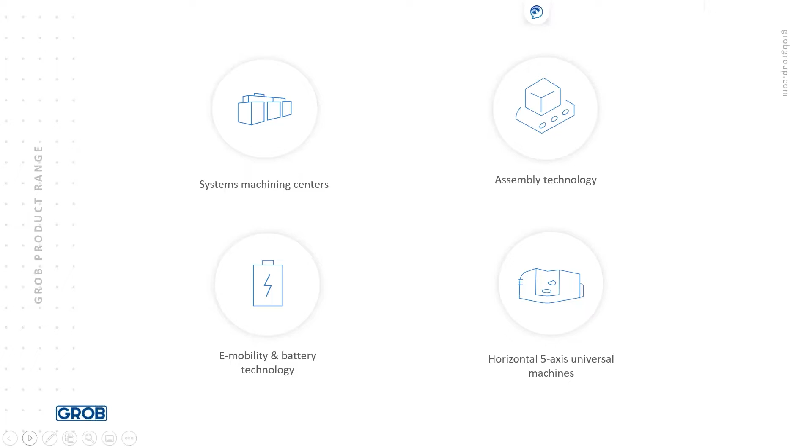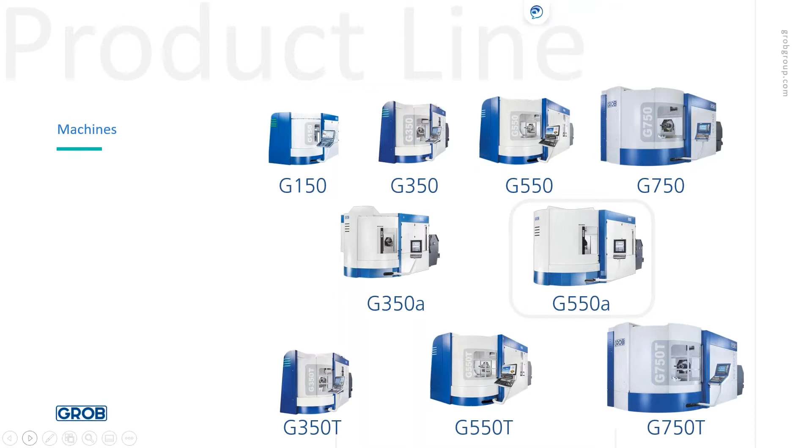Some of the advantages of our design, the GROB system. We have quite a bit of A-axis stroke. It's the largest that you'll find in the industry. It enables us to do overhead machining. One of the benefits of having that swing is that it's easy to clean off our pallets, wash them down, get chips out, so it's easy for automation.

Then the horizontal spindle concept, like I said earlier, cleans out the work area so you're able to flip the part upside down. And that gives you a good way to clean it, but also access components, part of the component that is a unique tangent point.

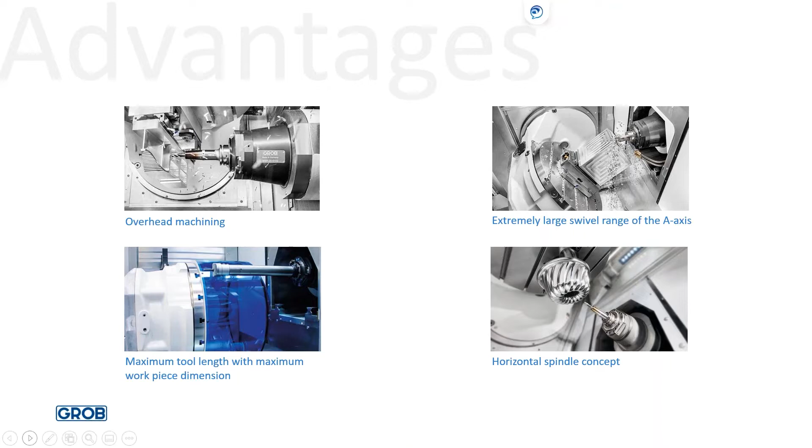In the US, we're set up to support North America, Mexico, Central America, and we do have application engineers stationed there. We have service coming out of there. We do have a crew of mechanics that build the machine, that are able to go out and support the machine. We have our sales based out of Bluffton, and we're also a hybrid, in that we do have somewhat of a dealer network in different parts of the country.

Hi, everyone. My name is Ernie Dickinson, and I'm representing Open Mind Technologies. We developed a product called hyperMILL. hyperMILL has been around for roughly 25 years. We are a global company with 17 subsidiaries and over 50 resellers. You can see we have many licenses out in the field, many customers covering many different industries.

Our global headquarters is in Munich, Germany, where we develop the software. Locally here, we are decentralized and based throughout the United States and Canada, as well as Mexico and South America.

Primarily, we sell direct. We do have some dealers in some small locations, but for the most part, we are selling direct to our customers. If there's a problem, you come to us. We can go directly to the developers. There's really no middleman for us.

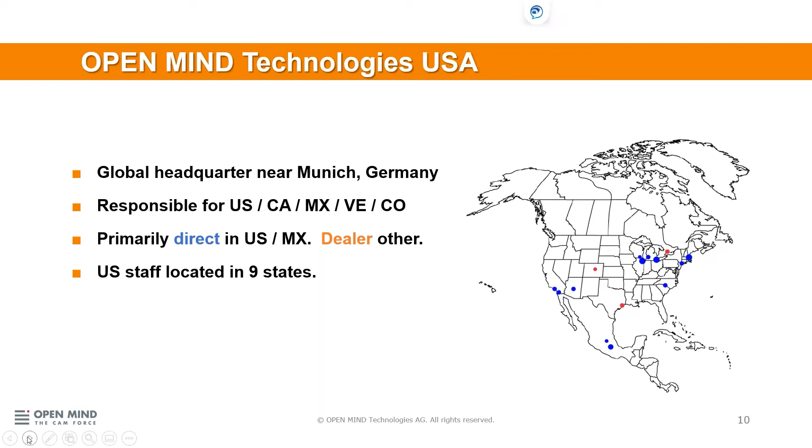We have staff located in 9 states through the more industrial part of the country. Here you can see our entire staff. Everybody in this picture has at least some 5-axis experience, a lot of number of years in the industry doing many different types of parts.

We do our own local post-processor development, as well as develop directly in Germany, especially for the more international machine tools like the GROBs. We offer hotline support. So you call us, we have an 800 number. We'll get on with you and do a webinar and make sure you're squared away. Also, we offer training as well, either direct or online, part consultation, and also partner collaborations as well.

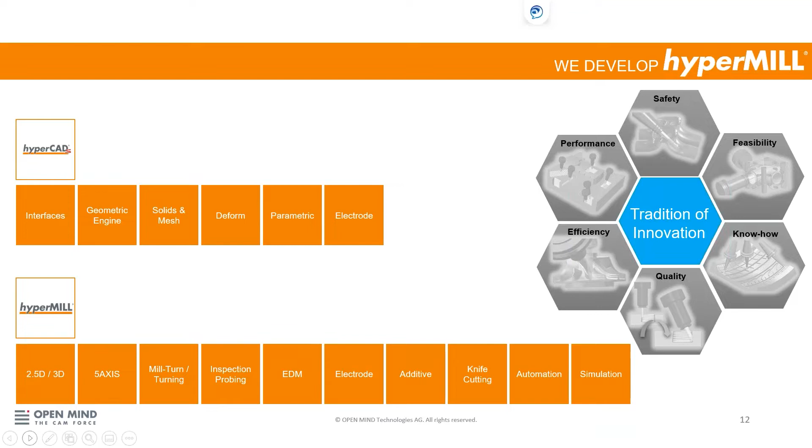In this slide, we want to showcase that with CAM, it's more than just creating toolpaths. CAM has become more of a nebulous thing where it's controlling the whole process digitally. That would be virtual machines, post-processors. We offer automation. We offer additive manufacturing. So a bunch of stuff on top of just the standard 5-axis programming is offered inside hyperMILL.

Hello everybody, my name is Evan Duncanson. I am a milling support specialist here at EMUGE-FRANKEN, and we're just going to go over a company overview of EMUGE-FRANKEN as a worldwide company.

EMUGE was established in 1920. There are over 1,900 employees worldwide, 9 production facilities worldwide. We have over 110,000 stocked items, different part numbers, global support, obviously, and we are also privately owned. The current owner of the company is the son of the founder, and his 2 son-in-laws help him run the company day to day.

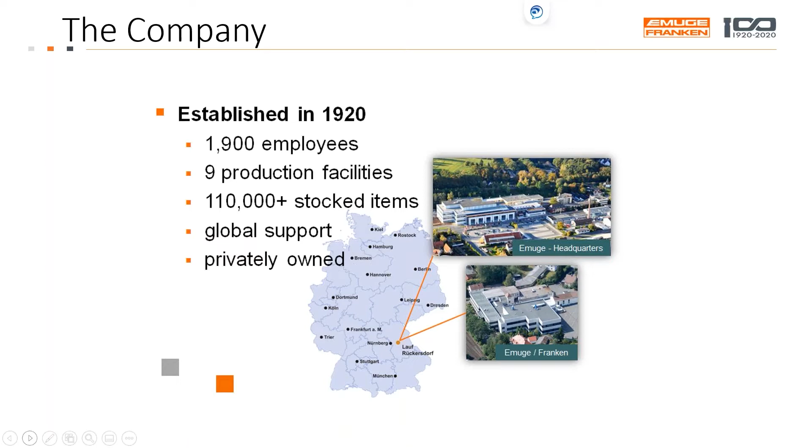So for manufacturing in Germany, EMUGE is based in Lauf, Germany, about an hour or two away from Munich. And EMUGE makes everything, from taps, thread mills, drills, holders, work holding, kind of the whole gamut, other than our milling products.

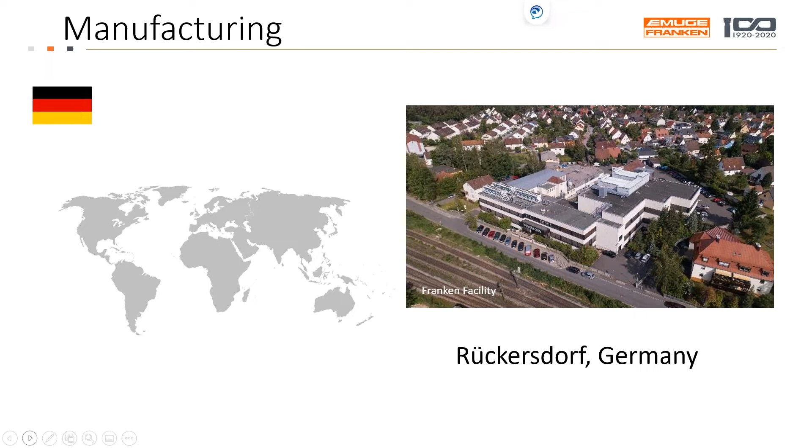And our milling products are made by Franken. So we are the same company, but we still have the 2 different names. Franken is based in Rückersdorf, Germany, about 15 minutes away from Lauf and EMUGE. They're right down the road from each other. And they make everything milling and also some tool holding, specifically for milling. They were just established in 1916, so Franken is actually older than EMUGE. EMUGE purchased them about 60 years ago, so now we're one company. Franken is comprised of over 400 employees, and they're in Rückersdorf, Germany.

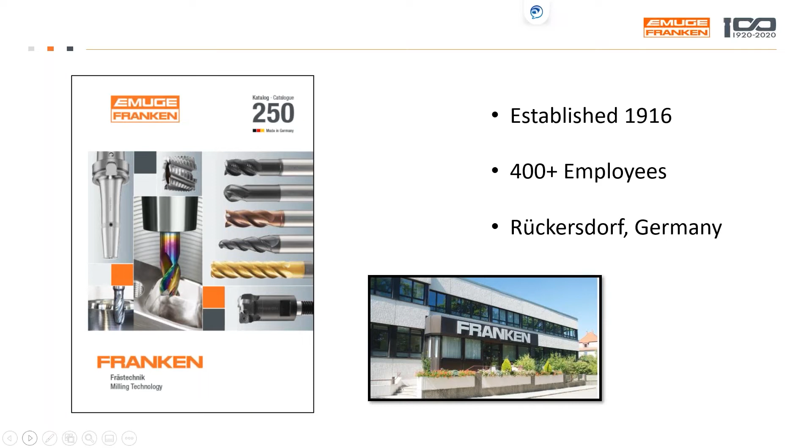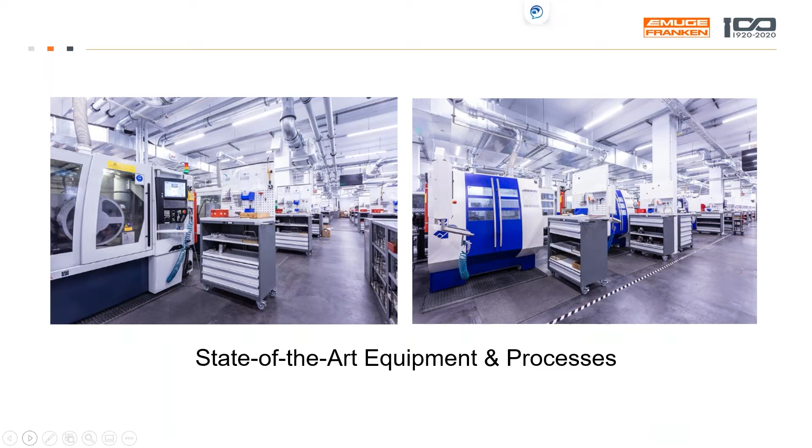And then here in West Boylston, Massachusetts, that's where we're located. So we're the EMUGE-FRANKEN location for the US and Canada. We have over 26,000 square feet of manufacturing space in our new building. We doubled the size of our building a few years ago, and 26,000 square feet of that was for manufacturing.

So those are full of ANCA machines for special and standard end mill production. And then we do also have a PVD coating vessel, so we can do coatings of end mills and drills and all sorts of other stuff in-house as well.

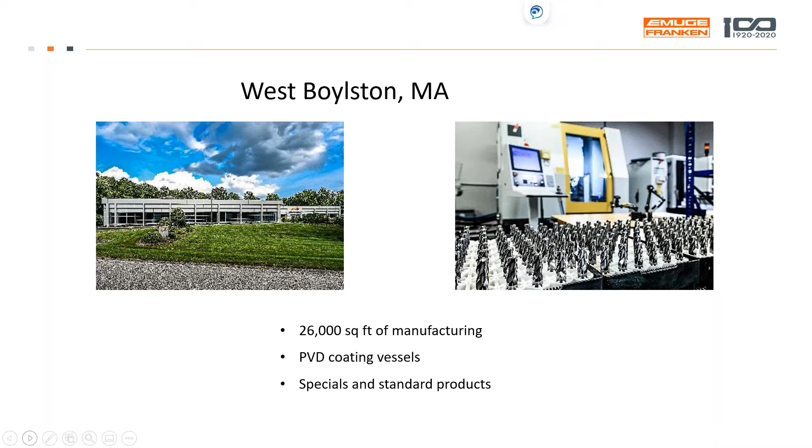Along with actual manufacturing, we have our technology and training center. So our technology center has the GROB 550A machine, and then we have several training rooms of various sizes that we can hold trainings or events in. We like to use the training or technology center as much as we can for test cuts and events and all sorts of stuff where we can actually use the tools and cut material.

EMUGE and Franken are always continuously improving and doing a lot of R&D with different revolutionary ideas or tools. So these are just a couple.

The punch tap and the Taptor are currently the fastest way to make a thread in cast material for the automotive industry. The self-lock thread is a self-locking thread, as the name suggests, that locks the bolts in the thread and does not let excessive vibration pull the bolt out of the threaded hole.

Our circle segment tools are for faster finishing with 3D 5-axis toolpaths. Our PAGODE cutter is a new version of a Christmas tree cutter or fir tree cutter that helps stabilize the process so much that we can go up to 10 times faster feed rate and have 10 times longer tool life than a regular fir tree cutter.

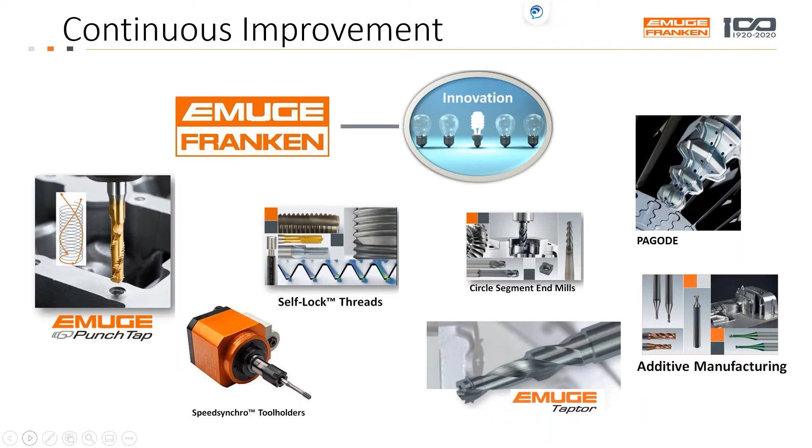So here today, at the die mold workshop, this is the component that we're going to cut. The component is just a generalized component that has certain features on it.

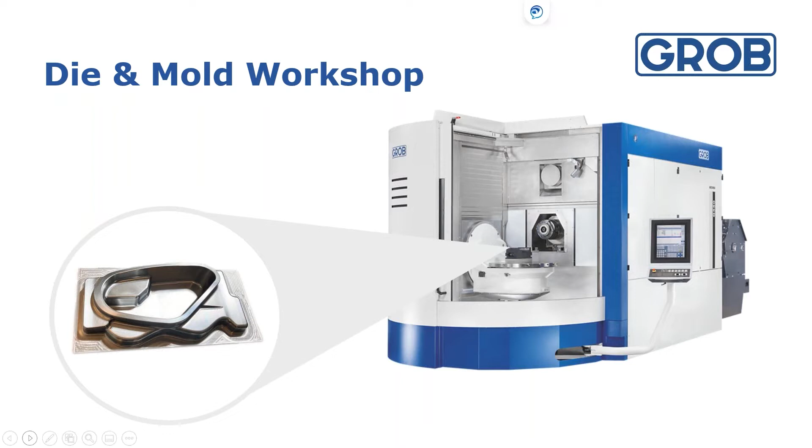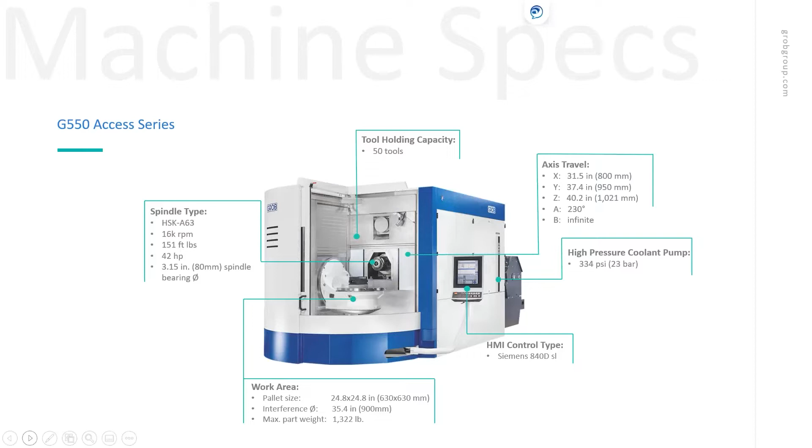Looking at the G550 Access series, which is the 550A, you can see that we're outfitted with an HSK 63 16K spindle that can generate 42 horsepower. The tooling capacity of this piece of equipment is 50 tools. You can see the axis travels over there on the right. It does come with a high pressure coolant system, and we have a Siemens control with our GROB interface. Our work area is capable of handling a 630 millimeter pallet, and on a diametrical, it can handle up to 35.4 inch diameter, max weight of 1,300.

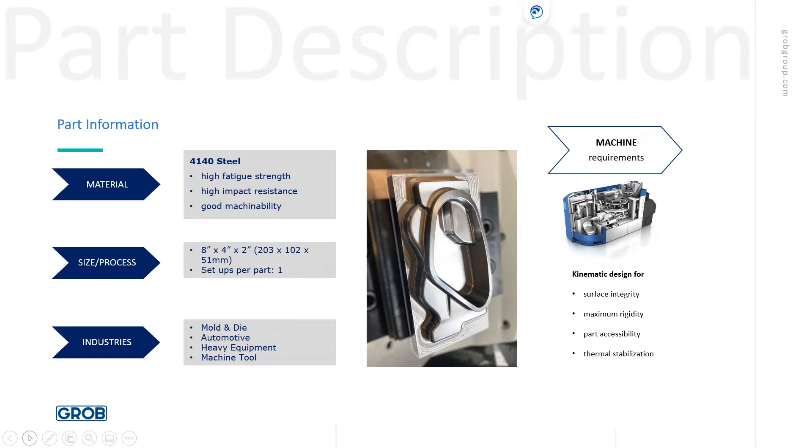Here's some more information about the component. It's a 4140 steel component. It's relatively small compared to the size of the machine, 8x4x2. And yes, you'll find this in die mold, automotive, and other industries.

So we're going to talk about the roughing tool that we're going to use to rough out the part here. It's a multi-cut duplex, and there are several key features that I want to go over that make this tool an all-around very good tool for roughing out die and mold parts.

So the first feature on this tool is the duplex geometry. The duplex geometry is the high feed end on the end of the tool. It has a negative rake angle, so it actually pushes the material instead of cutting it. Because of that, you can increase your chip per tooth significantly. You can go up to 40 thou chip load with a very shallow depth of cut, but a very large step over and a very large chip per tooth to just blast through that material and cut out a lot of material with this high feed strategy.

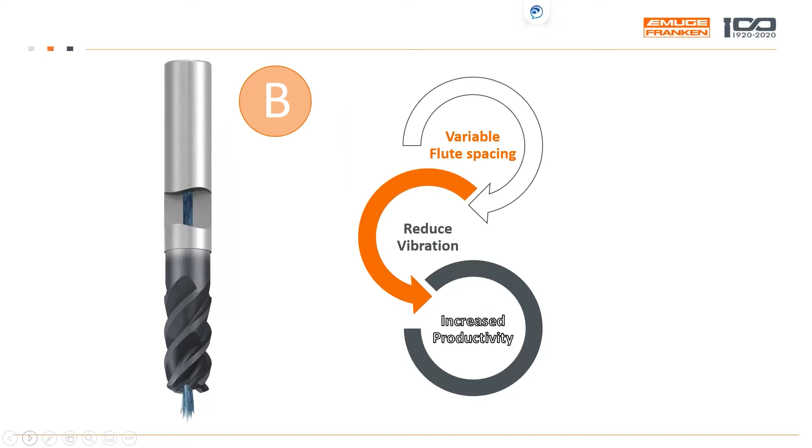One more feature of this tool is the variable flute spacing and the variable core diameter. So the first half of the flute, from the end of the tool, actually has a much smaller core diameter than the second half. That's because if you want to slot very aggressively with this tool, having a smaller core diameter with bigger flute channels and more chip space allows you to get the chips out of there and really blast that material. But the second half has a much larger core, so if you want to use it in a more long length of engagement using the whole flute length, it's a much more rigid tool than having that small core all the way up.

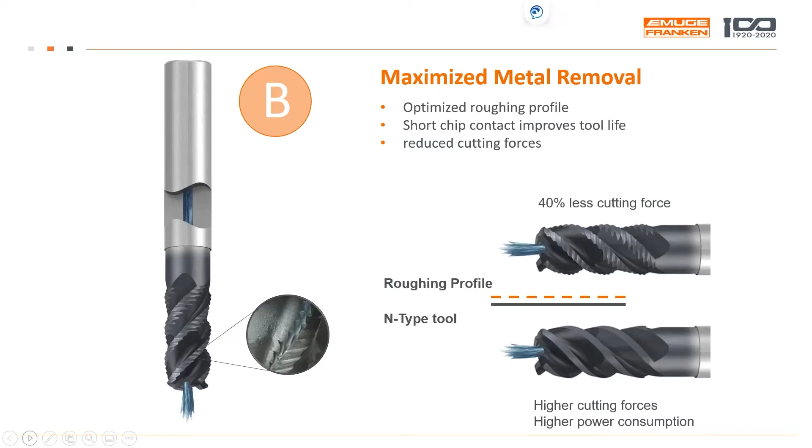Also, the multi-cut feature of this tool refers to the roughing profile. It's essentially a high performance new version of a corncob rougher. This roughing profile reduces the cutting forces by about 40% on the spindle, because you don't have that one smooth edge in contact with the material at all times. You have a lot of these tiny little teeth, and it reduces the amount of forces. You can see in the picture there, that's actually the chip formation on each one of those little teeth. So it produces very small chips that are very easy to evacuate and get out of the way.

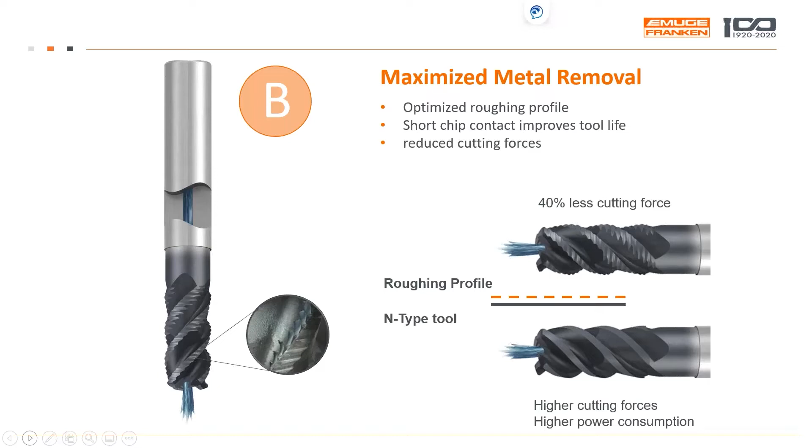One more feature of the Duplex series is it comes with coolant through. So some of the Duplex tools are solid, and some of them have an axial coolant hole. Normally with cutting steel, we would suggest using just an air blast. But if you have a part with a small pocket and you're having a hard time getting the air down in there and clearing the chips out of the way, and you're packing chips and double cutting chips, the coolant through can be utilized to blast those chips out of there and get them out of the way.

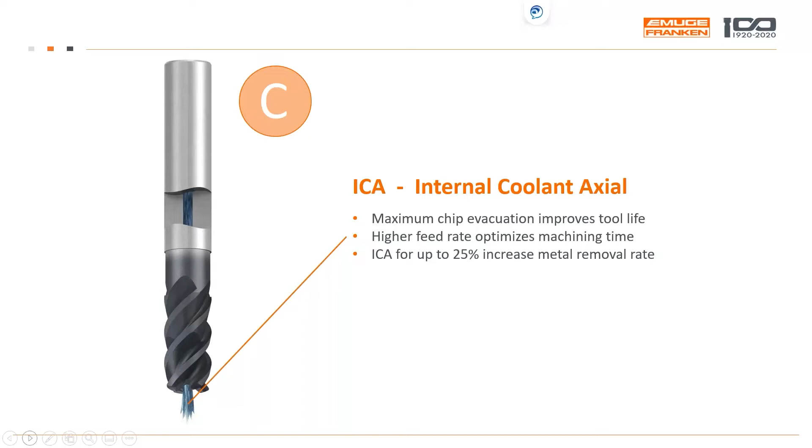And then you can actually increase your metal removal rate because of that. One more feature of the Duplex series here is the coating.

So the coating on this tool is a TiALN multi-layer. It's actually a really interesting coating. It's not just one layer of TiALN, it's several layers. What's interesting is when you put some heat into it and get it to a certain temperature, it actually creates an oxide layer on the outside of the coating and changes its structure and characteristics, and becomes harder.

If you weren't putting as much heat into it, it's not going to hurt the tool at all, but actually getting some heat into there will prolong the life of the tool, surprisingly.

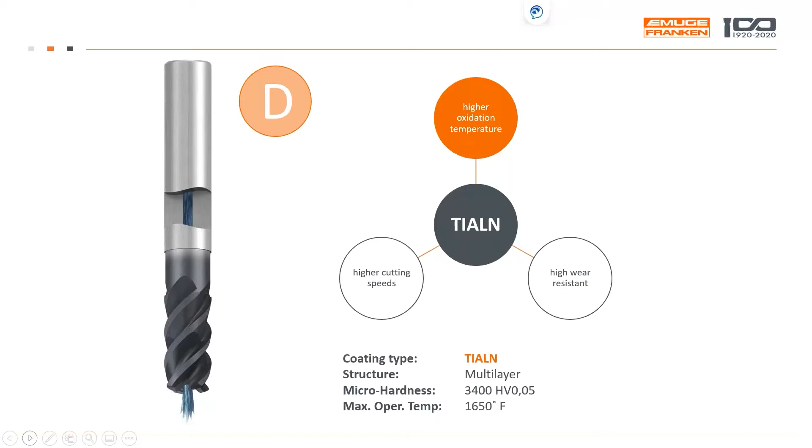And then one last feature of the Duplex series is the carbide. It's a very high grade sub-micro grade of carbide, very high hardness, but it also has some flexibility in there. Because you're going to be using this in very high feed rates and very high force applications, maybe doing very heavy slotting, a higher hardness, more brittle carbide is just going to break down a lot faster because it's not going to allow the tool to move around just a little bit that it needs to be able to slot aggressively. And this carbide can do that.

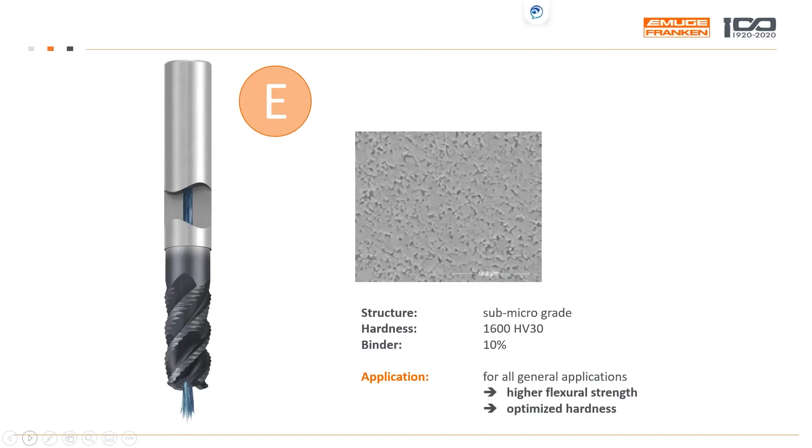On the GROB, as I mentioned briefly earlier about the horizontal spindle, you can see in this animation that on the left side, the horizontal spindle sits on a carriage that has linear guideways. There are 3 trucks on each side of the spindle for a total of 6 trucks. So as the spindle moves out into the work area and engages the component, we have the ultimate rigidity. We're not extending beyond the linear rails or the carriage, and we can approach and pass the center of that table.

On the right side, you see the animation of a vertical 5-axis with a trunnion table underneath. As that spindle comes down, it projects outside of the trucks, so you have a large unsupported area the closer you get to the table. GROB firmly believes that the horizontal approach is the most rigid, most flexible, and the easiest to use.

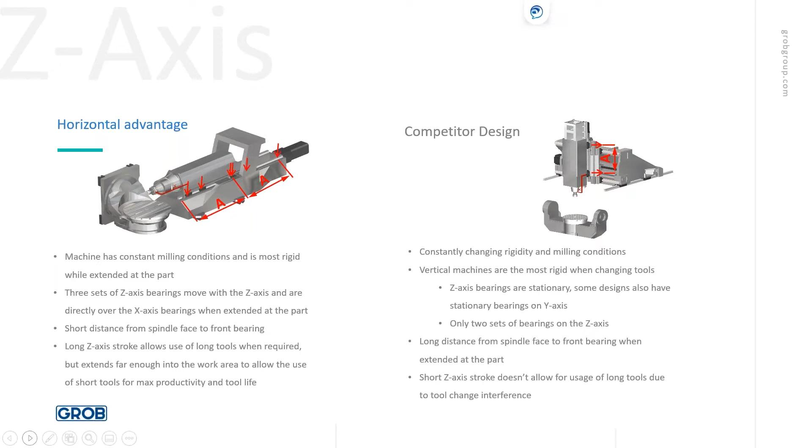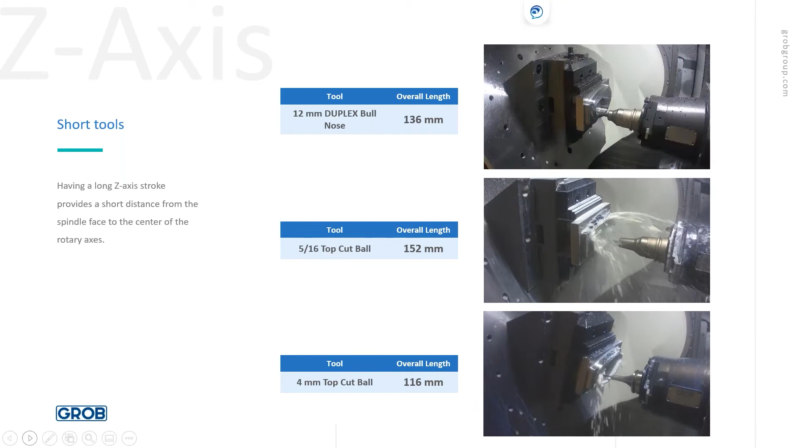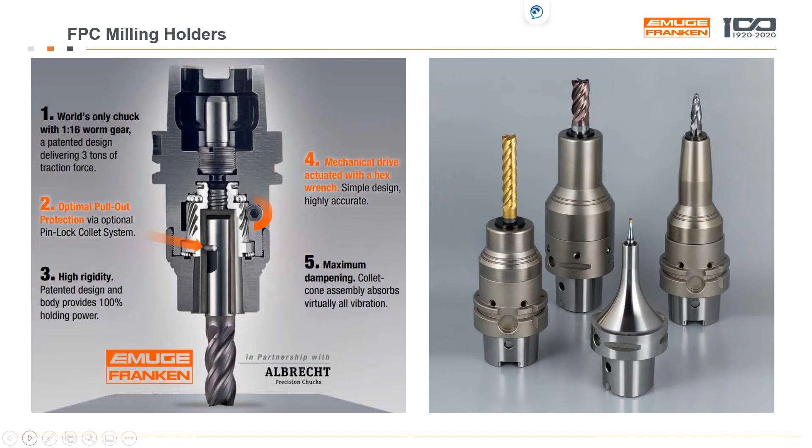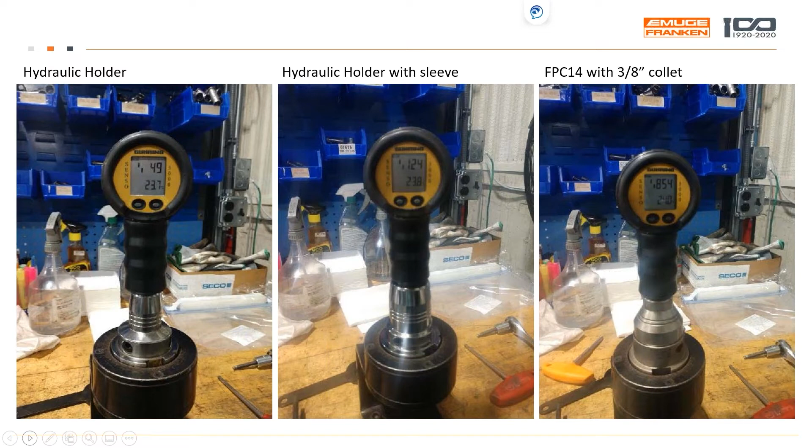We're not using circle segment tools on this part, but I always like to talk about them real quick. If you're not familiar with the circle segment technology, it essentially takes a ball mill, you zoom in on it, and then you take a small segment of that ball and put it on a tool. For instance, a taper form end mill, one of the shapes we offer, say you have a 16 millimeter shank, that might have a 1,000 millimeter cutting radius on it. So it's like using a 2 meter diameter ball end mill, but on a 16 millimeter shank tool. Because of that, you can increase your step down or step over many times, from say maybe 5 thou to 80 thou or something like that. And that just decreases your cycle time to finish a part.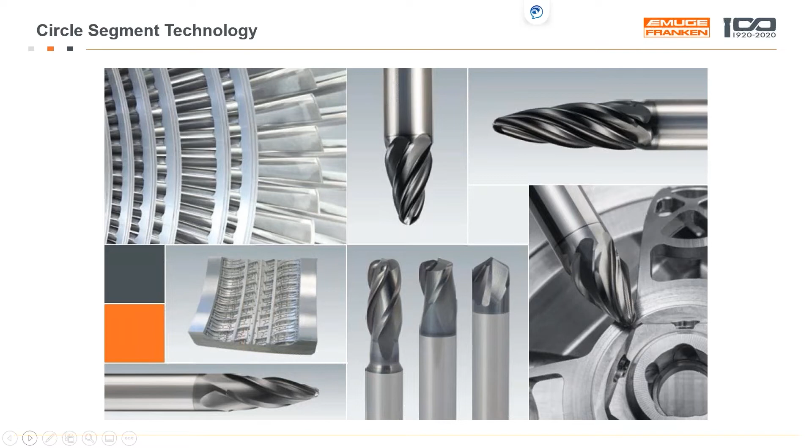There's 4 different types or shapes that we offer. The taper form up at the top is like the one I was just talking about, which offers the largest radius option of all the tools. The oval form is kind of the next option I like to go with if I can't fit a taper form in there. The oval form has a smaller ratio from the shank to the cutting radius, but because of that, it can fit into other areas that the taper form might not be able to. Then the lens form, that's mostly for shallow floor finishing, say a tire mold or something like that. And then the barrel cutter, kind of a standard barrel shape, that's mostly only used for undercuts.

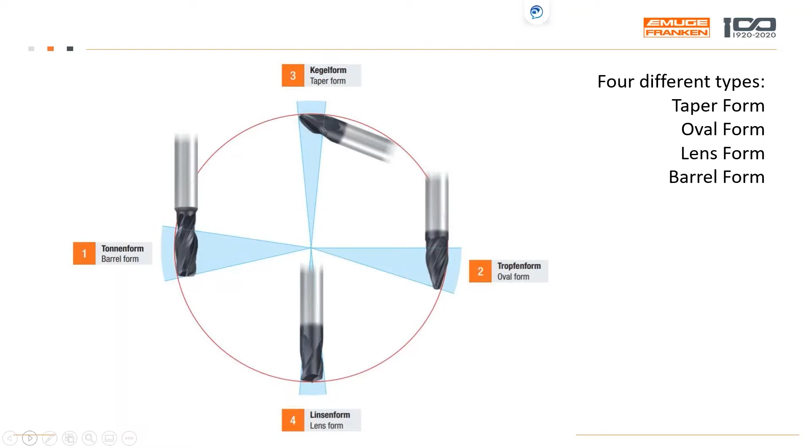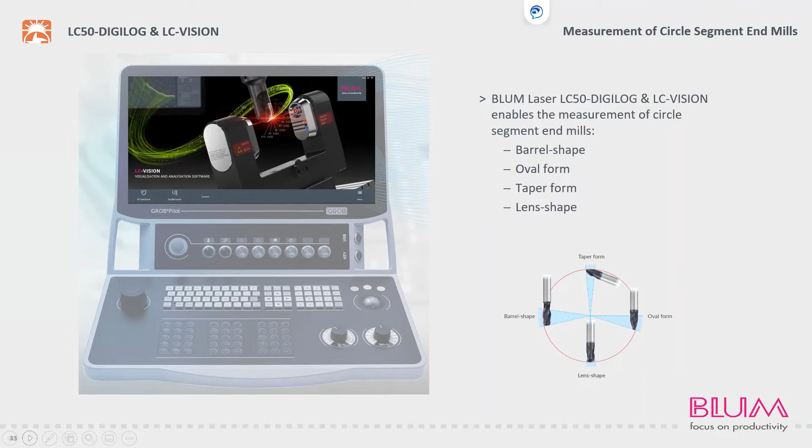On the GROB, for tool length and diameter, we use a DIGILOG from BLUM. The DIGILOG is capable of handling a lot of different geometries that are on tools, just like Evan mentioned, so it can handle the barrel shaped tools, the oval forms, taper forms, and lens shaped tools. This is just showing you a little bit of a graph and simulation of measuring a barrel shaped style tool and the typical readouts that you're going to get from it.

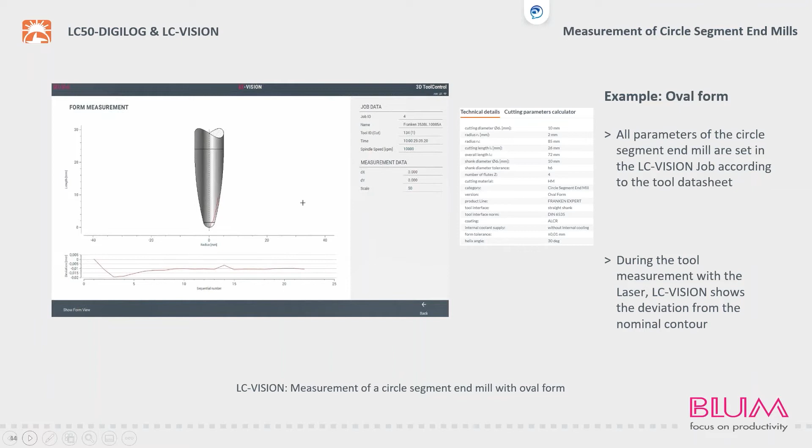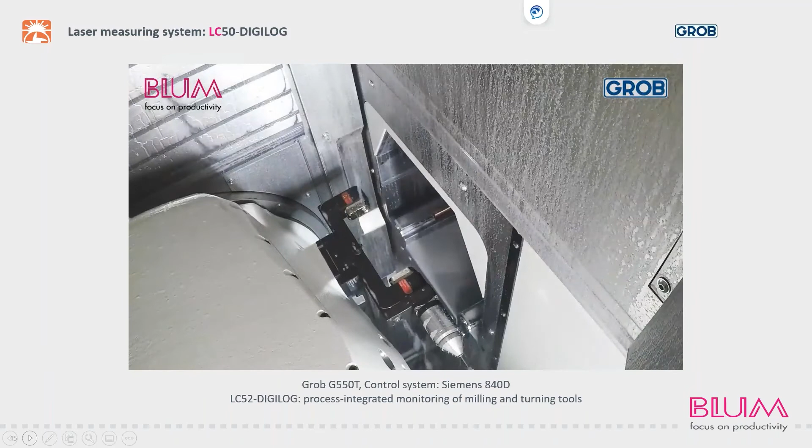This is going to be a little bit of a video showing you that operation inside the GROB. A couple of things to pay attention to: you see that the spindle is working out of its tunnel, it's not really inside the work area. And once we flip the table over to get to the BLUM, most of the chips and the splash go away, so we have nice access to the BLUM laser.

One of the other options with the GROB, and part of the design and build of it, is that we can use longer tools right out of the tool changer without making any alterations to it. You can see on the left side there, the machines 150, 350, up to the 750. It gives you the numbers of the longest tool that you can put in the tool changer and that'll swap out in the operation. So on the 550, you can see that standard, we can put an 18.3 inch long tool in there. So the flexibility of that machine is pretty immense when you look at the length of tools that you can accommodate in regular operations.

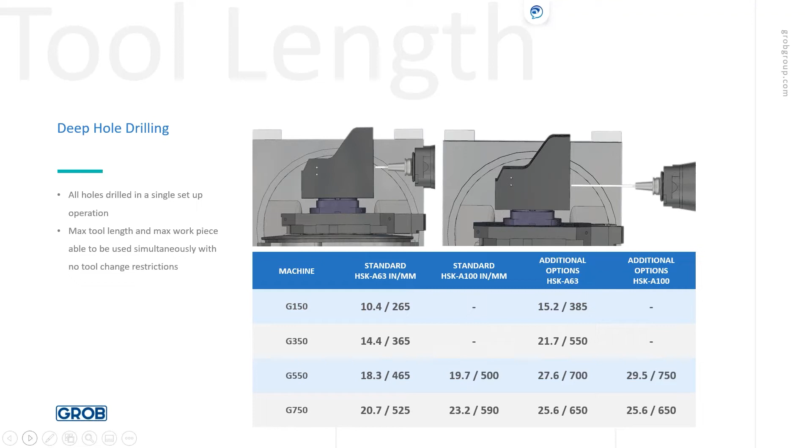Thanks, Kevin. At this point, I want to talk about some of the programming techniques and tools inside the CAM software we used for this part.

The first one I want to speak about is our automatic extension of milling surfaces. This is done based on whatever boundaries we're picking, and essentially it's an automatic way of extending those surfaces, so there's a nice runoff with the tool path and you're not starting and stopping on actual material. This is all done automatically inside the software. In the old days, it was very common for people to construct these surfaces using the CAD system, but now we've integrated some of that CAD power inside the actual tool path itself, with some knowledge of where they actually be and how far they have to go for it to work.

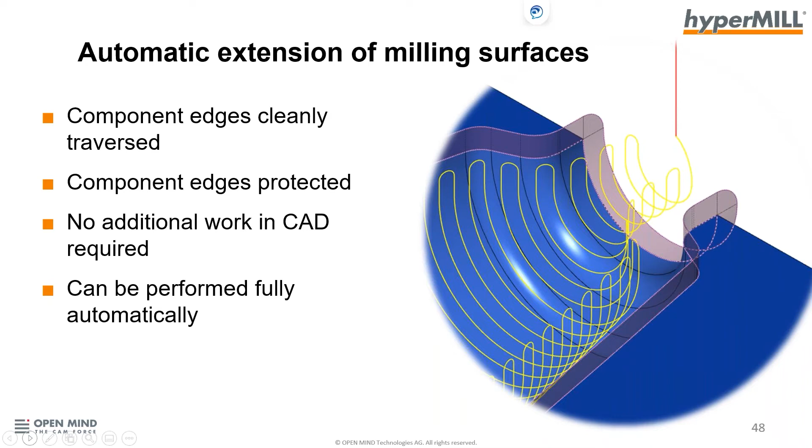This is implemented in a few of our cycles: the 3D profile finishing, the 3D Z-level shape finishing, 3D corner rest machining, 3D equidistant machining, and also our 5-axis tangent machining. And this list is ever increasing, so we're adding it in places where we feel it's needed moving forward.

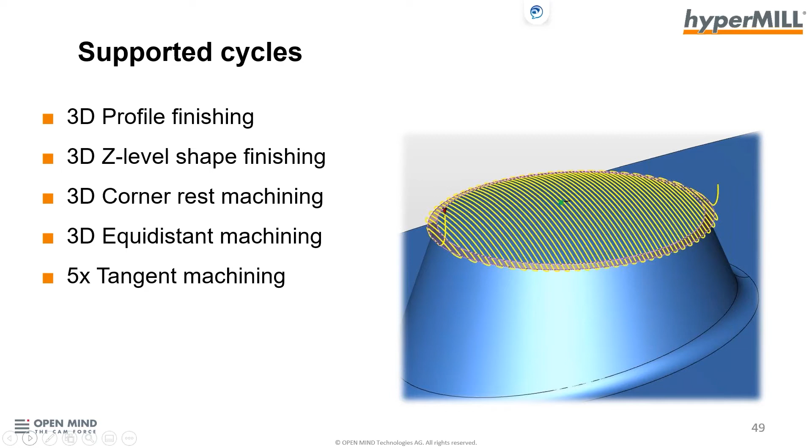So a second tool we use to sort of go along with the automatic surface extension is our smooth overlap function. The smooth overlap can work in conjunction with the surface extension, or it could be on its own. Essentially what this does is it adds some extra tool path to the intersection between other tool paths, and it starts off the part a little bit. So you're no longer coming down, starting on a previously machined area and then working into the area you want to machine. It actually builds in a smooth transition from one area to another.

So we feel this is a game changer when it comes to mold and die applications. Anytime there's transitioning between surfaces, this is a very powerful tool to make sure that transition is as smooth as possible, and you don't see any start and stopping or any difference between the tool path.

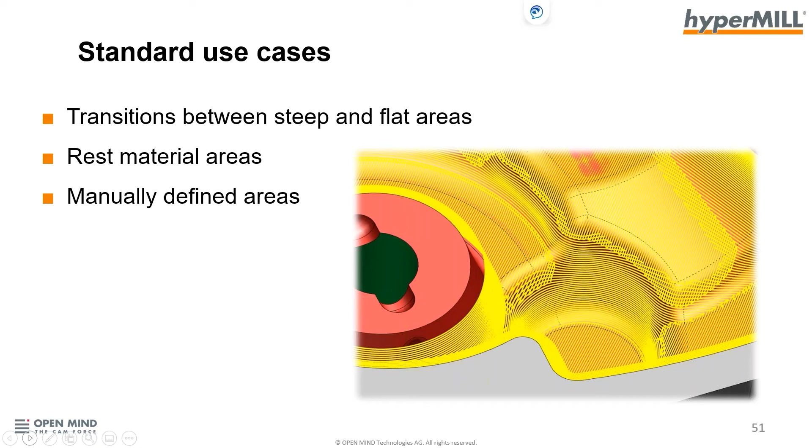This is supported, once again, a list of what this is supported in for us. And for sure this is an ever-growing list, but right now it's 3D profile finishing, 3D Z-level shape finishing, and our rest material cycles.

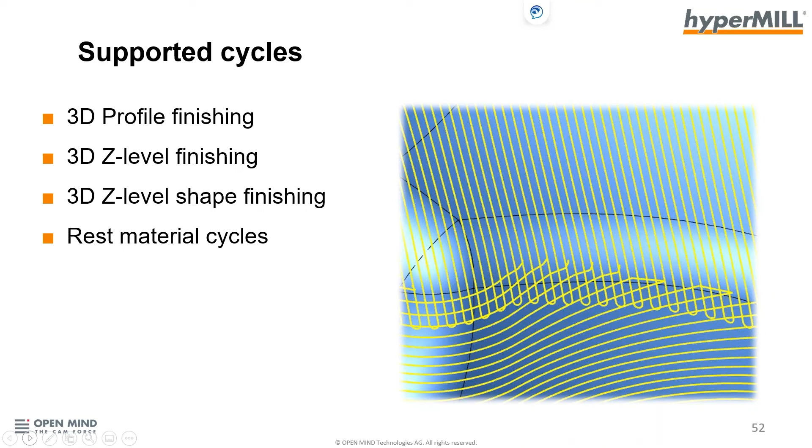In this picture, you can kind of see with and without. This is just like a simple 3D ISO on a fillet. You can see without the smooth overlap, it starts on the surface, on the tangency point of the surface, and it ends at the tangency point of the surface. Automatically, the system will put in a couple extra passes that sort of curl into the tool path. It's not just a simple extension, there is some lift to that as well. That way, as you're transitioning from the horizontal to the more vertical surfaces, once again, you don't see any overlap. Anytime maybe there's spindle growth or tool wear, this smooths that transition between those two areas.

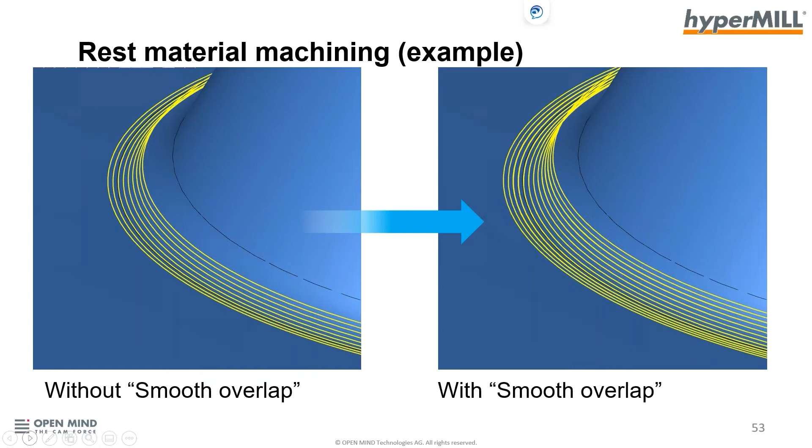And one last picture, just showing you that little lift. Once again, so we're not starting in the material and sort of moving into it. We're actually off it a little bit, and we slowly move down into the material and then slowly move off on the other end, guaranteeing that smooth transition.

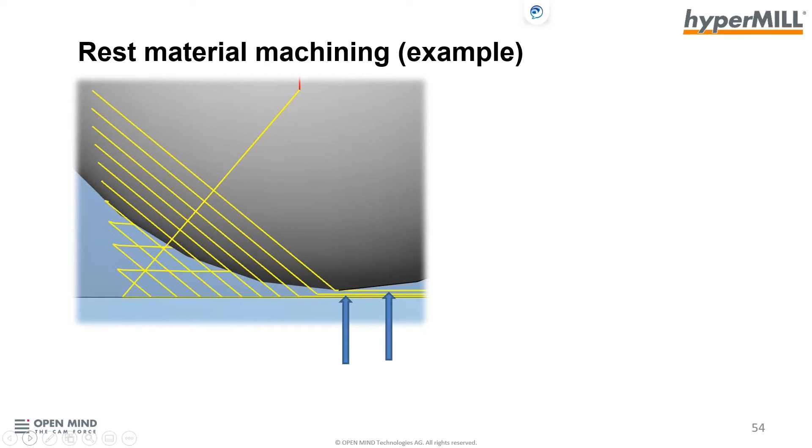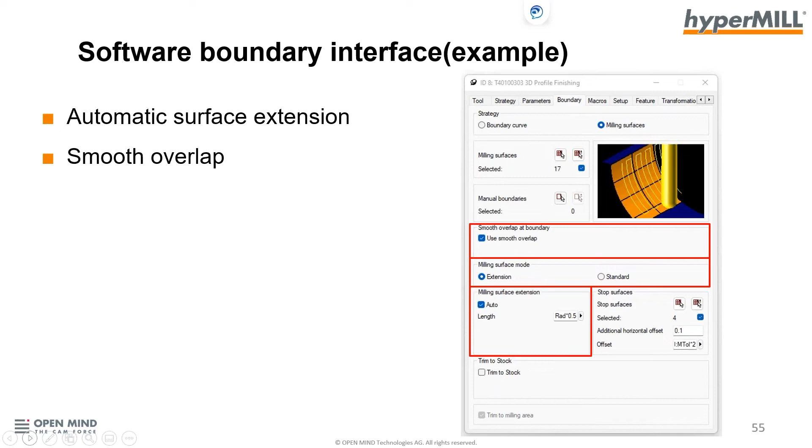To control that, that's why we kicked it up at 30 degrees to minimize the rotation. This machine, 550A, does have a worm-driven rotary, so it's not a torque motor. You don't want to introduce any more inaccuracies or heat than you have to, so you want to be nice to it so it can perform for you. So something as simple as kicking it up 30 degrees is going to minimize all your rotation when you're doing true 5 axis.

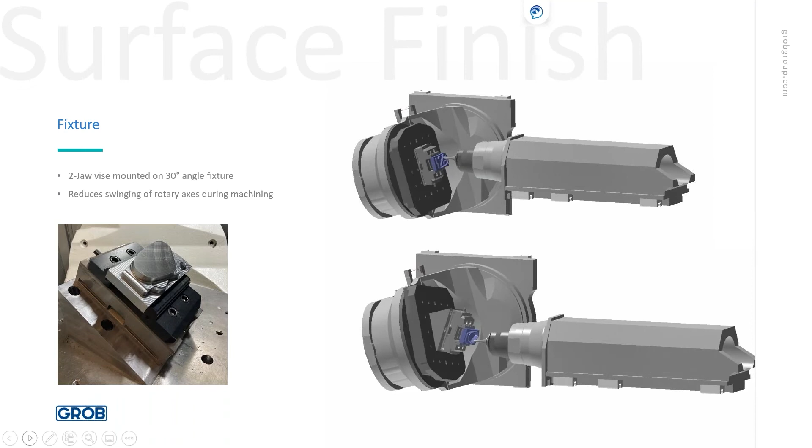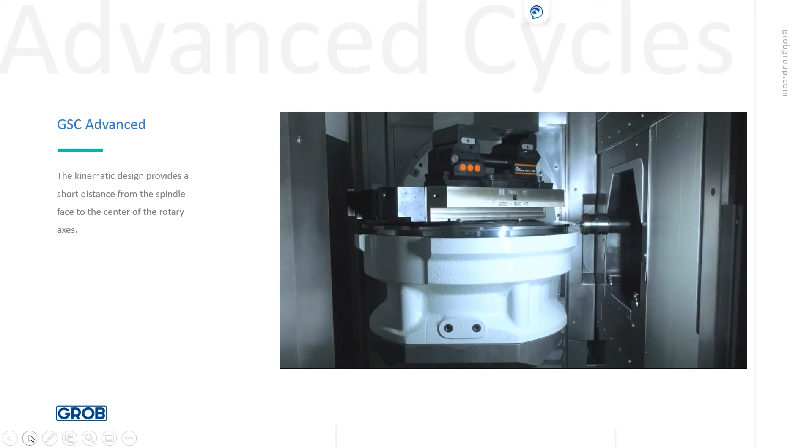Another feature we can use, though we didn't use it on this one, is a calibration system that calibrates the kinematics of the machine. We refer to that as GSC light - here it says advanced, but it's a light version - where we can probe the ball on the pallet itself. So when you pallet change, we can actually do a kinematic check. The other method requires the table to be empty, putting on 2 tooling balls, and going through a routine that will adjust and calibrate the kinematics of the machine.

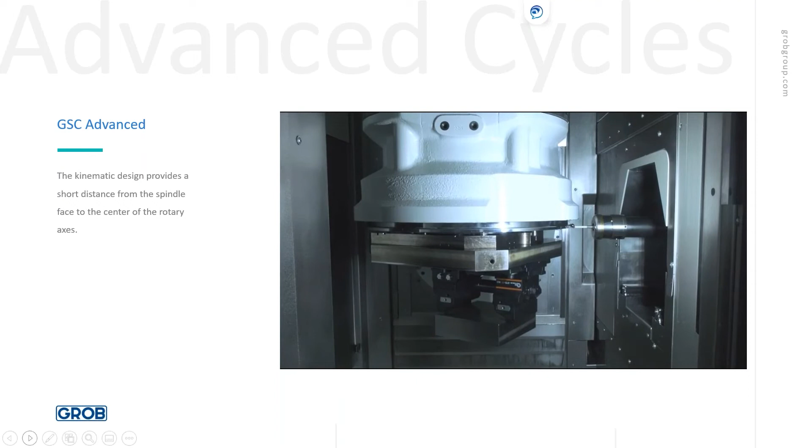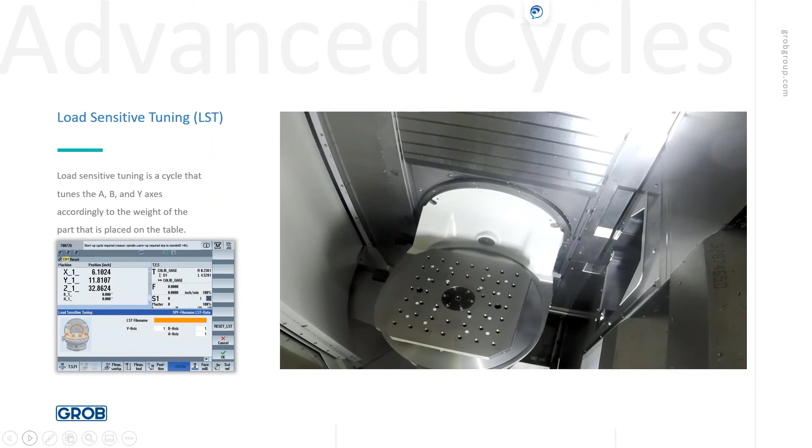Another feature we offer, which we don't have on the machine we used here, is load-sensitive tuning. Everybody has different weights depending on the component, and if you leave the axes as is, you might not get the ultimate performance if the component is heavier or lighter than expected. So load-sensitive tuning is the ability to tune the rotary to the weight of the component, which helps maintain accuracy and performance.

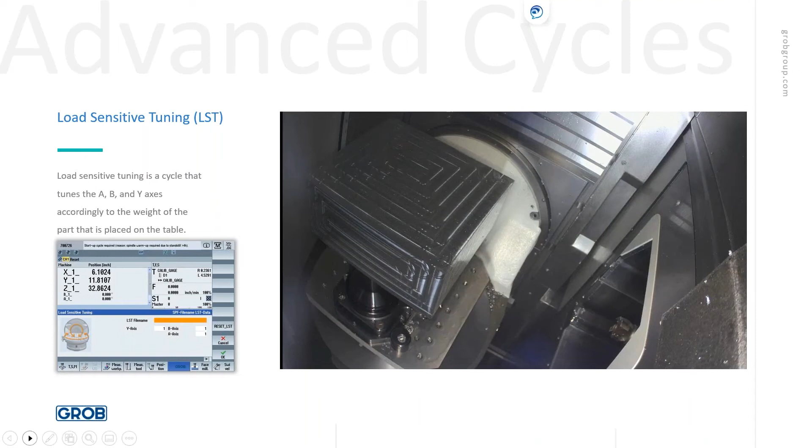Another tool we use to achieve a really good surface finish on this part is what we call high precision milling. To best understand it, we have to think about the history of how CAM systems work.

When CAM systems first came on the market, essentially what they were doing was applying toolpath to specific mathematical surfaces. If you had multiple surfaces, you ran a situation where there could possibly be a gap between these surfaces. This gap would cause the tool to drop into those surfaces, giving you a gouging situation, which obviously is not what you want when trying to get a good surface finish or even trying to make anything.

At some point, the industry decided to switch technologies and use a mesh model to check against, essentially taking the groups of surfaces we had before and turning those into a watertight mesh model that the toolpath couldn't penetrate. So there were no gaps between this. This was much better, and we could avoid the gouging situations, and it was much safer. Of course, the problem is any mesh, because it's based on triangles or polygons, would give you a faceted surface finish.

Which you could minimize with machining tolerance and having better machines and higher quality tooling and whatnot. But you would certainly see that in a situation where you had to polish, or maybe an optical type situation where surface finish was incredibly important.

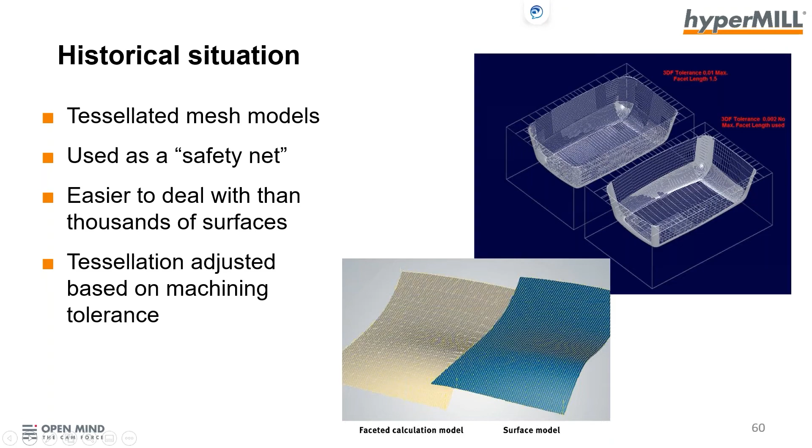So fast forward to the recent past, Hypermill was able to come up with technology where we check against the mesh because that's the safest mode of checking. But then we project the toolpath to the mathematical surface, therefore giving us that high surface quality we remember from the past, where you're actually machining on the actual surface itself and not the mesh.

So you can see here in this picture, there's a little bit of inconsistency in the toolpath - essentially it's picking up the facets of the mesh. If we click it one more time, you can see that with our high precision milling mode on, with the extra step of actually moving the toolpath points to the surface, it smooths out the toolpath, increasing surface quality, decreasing polishing time, and giving you a much better looking toolpath in the part at the end.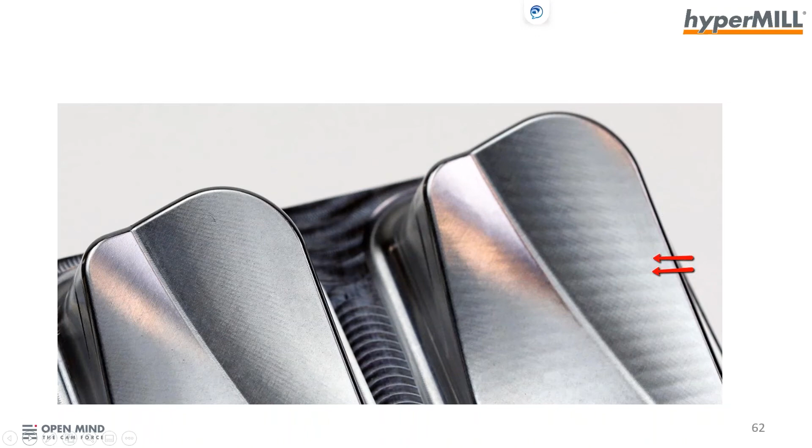Moving on to the last thing I'd like to talk about with this part is probing. Probing for us is a multi-prong approach. It's not just to check a part at the end, and it's not just to set up a part at the beginning. It's something to use throughout the entire process.

In regards to the setup at the beginning of the process, we can use the probe to check the stock. The stock is just a rough cut piece of material—maybe a forging or a casting, some inconsistent piece of material we're machining out of. We can check against that, align it, do a best fit. There's a bunch of things we can do with that.

We can also origin the machine with the probe. Maybe you just throw a vise on there and take two probe hits. There's a probing cycle that will automatically align the rotary axis to match wherever the vise is lined up, so you don't have to sit there and tap it in place and put an indicator on it.

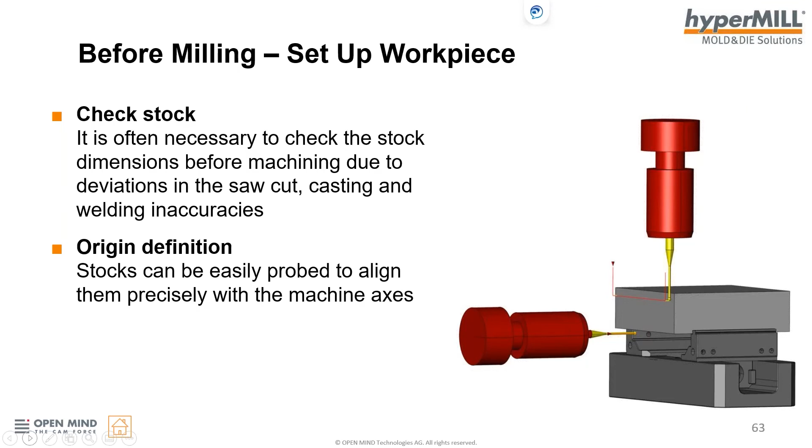We can also use it during the process. Perhaps you pre-machine a couple pockets or even finish machine a couple pockets. Since this is fully embedded in the CAM system, right after the pocketing routine, you can grab the probe, come over, probe a pocket or probe a slot, like it's showing on the left there, and check that data. You can either stop the process completely, or use the data from probing to adjust the cutter comp, then go back to the original pocketing routine and finish it, fixing the cutter comp to what you need. So a lot of things you can do in process as well with the touch probe.

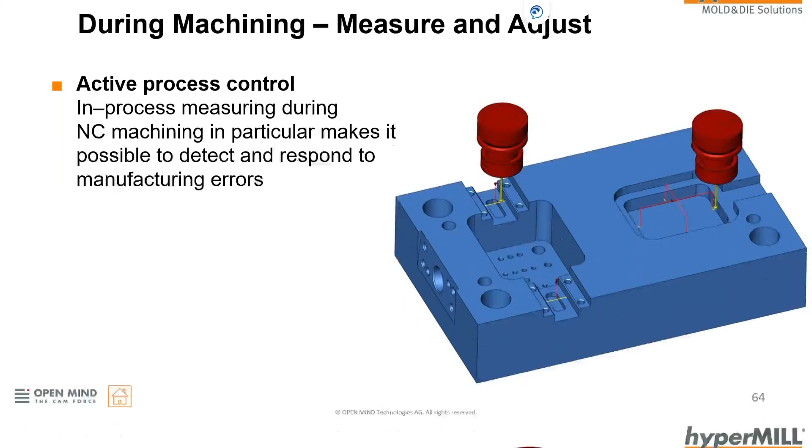Then lastly, do it at the end. You cut your part, it looks good—let's check it, let's make sure it's okay. We can check specific features like holes and pockets, and we can check 3D surfaces. Maybe you pick a couple of arbitrary points on the surface, bring the probe in, check it, see how far off you are. Maybe it's perfect and you pull the part off and put on the second part, or maybe you have to change something, then you can always go back and rerun the program, maybe change tools or whatever the case may be.

So once again, we look at probing as something not just at the beginning, not just at the end, but something you do throughout the entire process. And having it in the CAM system makes that possible.

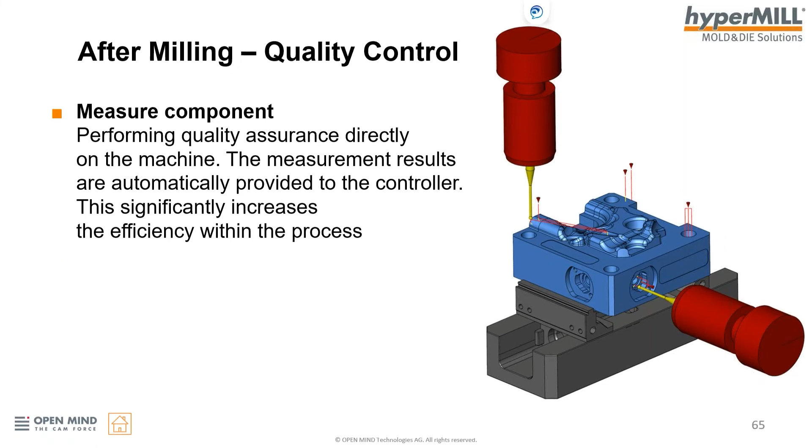And then finally, what kind of data did you get back out of this? I spoke about returning the data back to the CAM system where you change a cutter comp or change a tool, or you could just have hard data—numbers to look at, and you could see the actual deviation based on what tolerances you're giving it, where you're triggering the probe and everything. So all that can be read back through the control or through the CAM system.

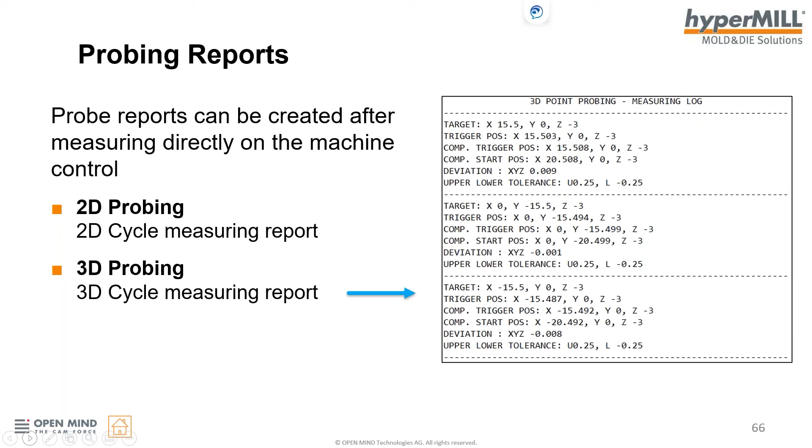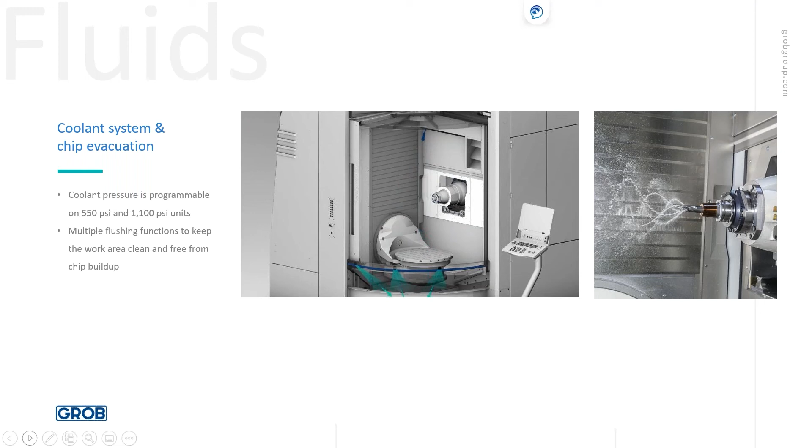Another thing to talk about on the GROB is its efficiency in getting rid of chips and being able to wash out the work area. This is really important if you're doing automation—it's always good to have a clean environment when you're swapping out pallets. So we have the coolant that comes through the spindle, the coolant that comes out of the tunnel, and the overhead shower along with the lower washdown areas.

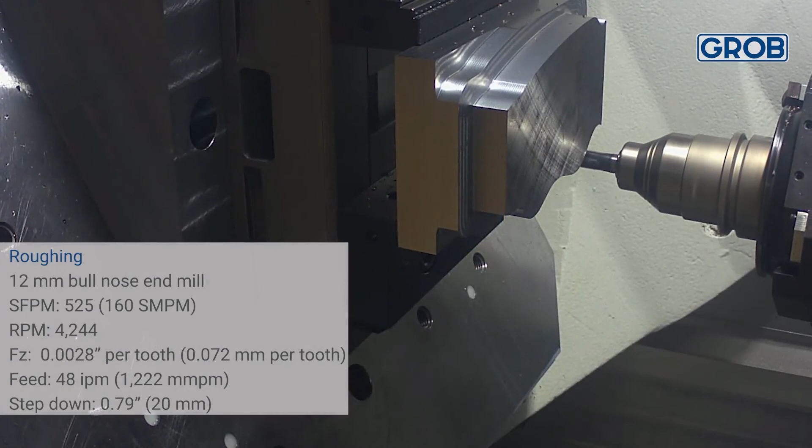Here we see the camera that's in the work area. We're seeing the component being roughed out—we're actually looking at the first roughing tool. You can see that we have it pitched up at an angle that gives us the tightest geometry between the cutting tool and the fixture, and you can see the smooth motion that's going on within that envelope.

We're using the 12 millimeter multi-cut duplex here. We're doing a high feed application on the outside, and then on the inside we helixed in, and now we're doing a very heavy step over at full depth. You can see just how small those chips are, getting out of the way because of that roughing profile. Very efficient way to clear the chips and cut that pocket very nicely.

From a CAM perspective, we used a combination of our 3D optimized roughing for the high feed and our max roughing for the more high performance roughing, getting deeper in the pocket. Also using something called plane level detection to pick up any flat areas and automatically put a tool path on those flat areas, ensuring that we leave the right amount of stock everywhere.

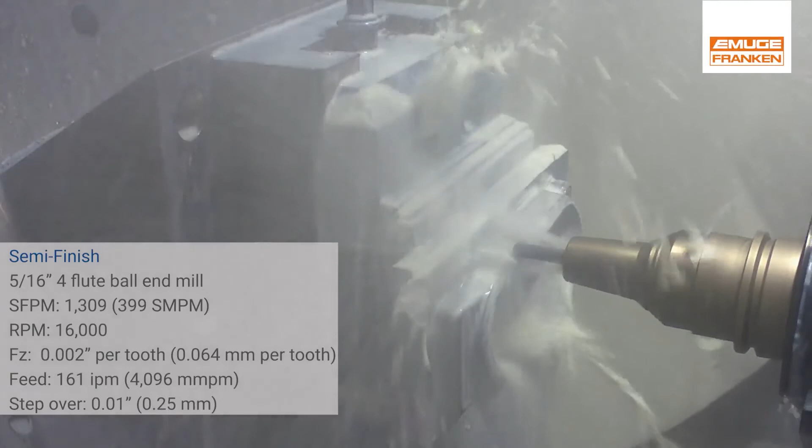Now we're using the 5/16 4-flute ball mill to semi-finish the part. You can see it's just whipping around the part, finishing all areas of it. And then you can see we're using the coolant through feature on the FPC tool holders, so it's pushing coolant through the collet, emulating a coolant through tool while using a solid tool. So it's a very efficient way, very high pressure coolant, instead of just blasting the low pressure external coolant on it.

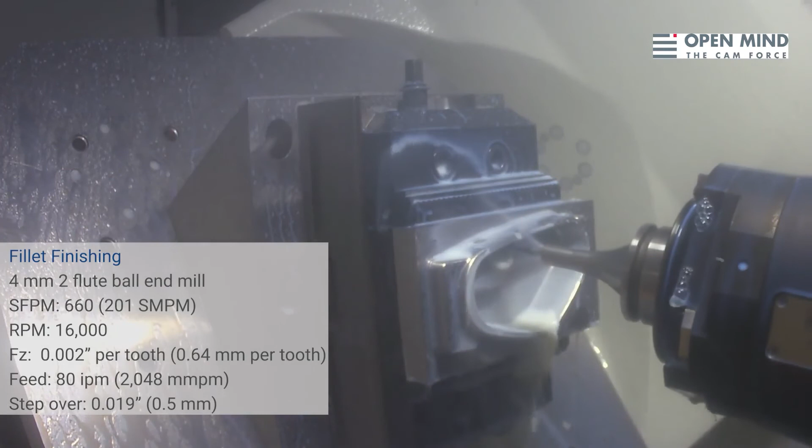Using a combination of Z-level shape finishing for the vertical walls and profile finishing for the floors, we were able to cover all the surfaces. Also using our smooth overlap technology and automatic surface extension, making sure the transitions are good.

Here we're using our 5-axis rest machine, which will use a combination of fixed 3+2 for certain areas, and also, as you see here, simultaneous 5-axis to get a more consistent tool path for all the remaining areas that have to be machined.

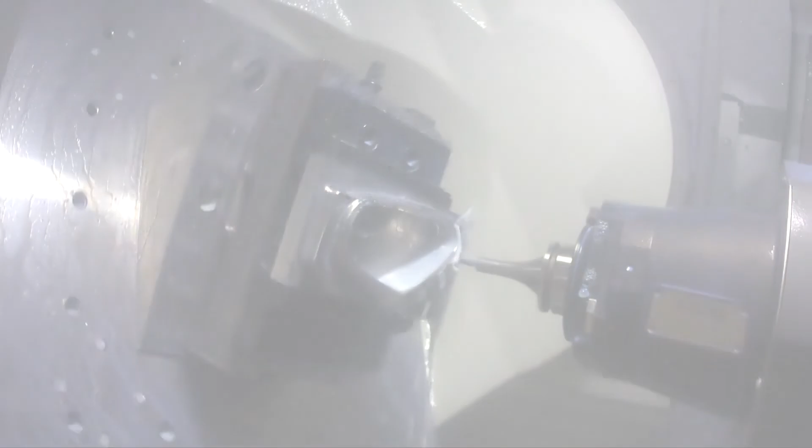We've had a couple of questions come in throughout the presentation. The first one is for EMUGE. Evan, why did we use a 2-flute ball mill instead of a 4-flute ball mill for finishing?

That's a great question. Normally, you want to use more flutes when you're finishing. You get a better finish, you can go a little bit faster with the same chip load. But with this part, the geometry with fillets and some corners, a 4-flute was just going to chatter or chirp a little bit, because it has a lot less flute space and chip space than a 2-flute. So the 2-flute was actually more efficient and was going to give us a much better surface finish than the 4-flute on this specific part.

Thanks, Evan. We have another one that came in. We'll direct this one to Ernie from Hypermill. What types of probes or brands of probes do you guys support with your probing cycles?

Currently, we support the baked-in probing cycles for both Siemens and Heidenhain controls. Those machines and those controls have their own cycles, so it doesn't really matter which probe they have. Also, above and beyond that, for machines that don't have those controls, we support the Renishaw cycles and the Blum cycles as well.